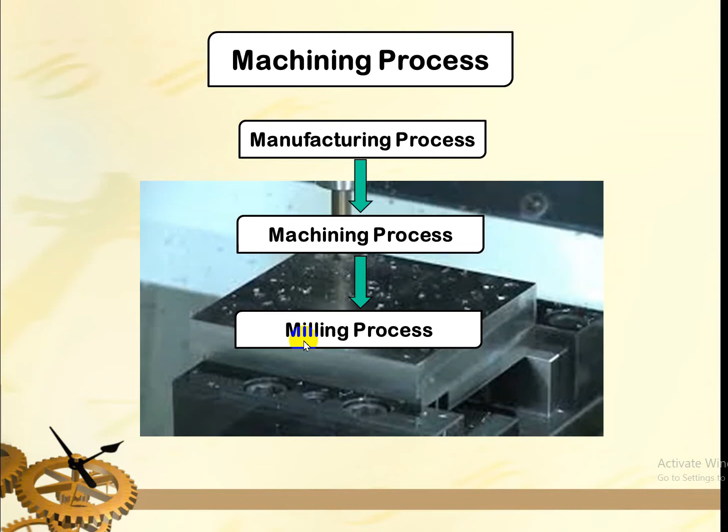Some of the challenges in manufacturing industries are how to achieve higher material removal rates and better product quality with good surface roughness.

In typical manufacturing processes, both are influenced by the cutting speed, feeding, and depth of cut.

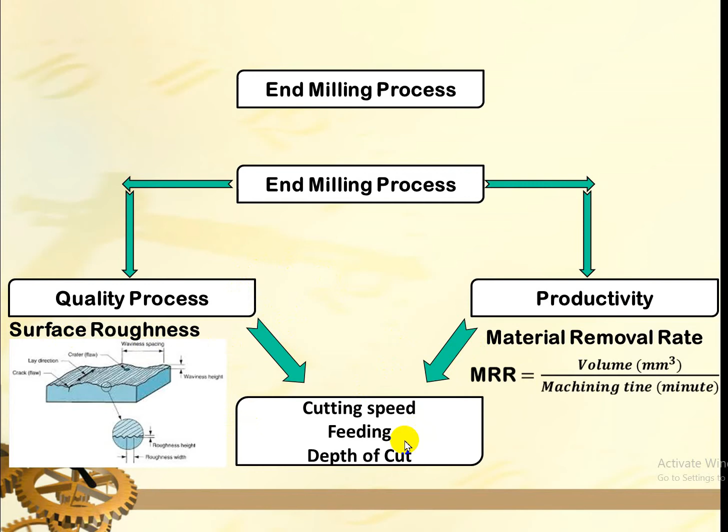Specifically, increasing both parameters will yield higher material removal rates, higher surface roughness, and heat generated by friction in the cutting zone.

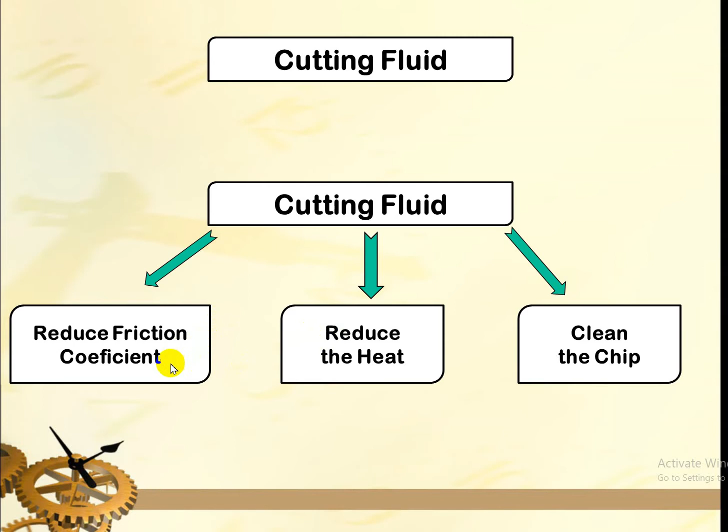Both the generated heat and the friction are commonly reduced by applying cutting fluids, which are also used to reduce friction coefficients and clean the chips.

Surface roughness has the smaller-the-better quality characteristic, while the material removal rate has the larger-the-better quality characteristic.

Therefore, the combinations of process parameters need to be properly selected regarding the machining tool and material properties in order to minimize surface roughness and also to simultaneously maximize the material removal rate.

This is needed to minimize surface roughness and also to simultaneously maximize the material removal rate.

The multiple performance characteristics could be achieved by determining the optimal parameters using the multiple performance characteristics optimization method.

In this research, a multiple performance or quality characteristics optimization method was developed based on statistical optimization.

The Taguchi method combined with Gray relational analysis is used to explore the relationships between machining or explanatory process parameters.

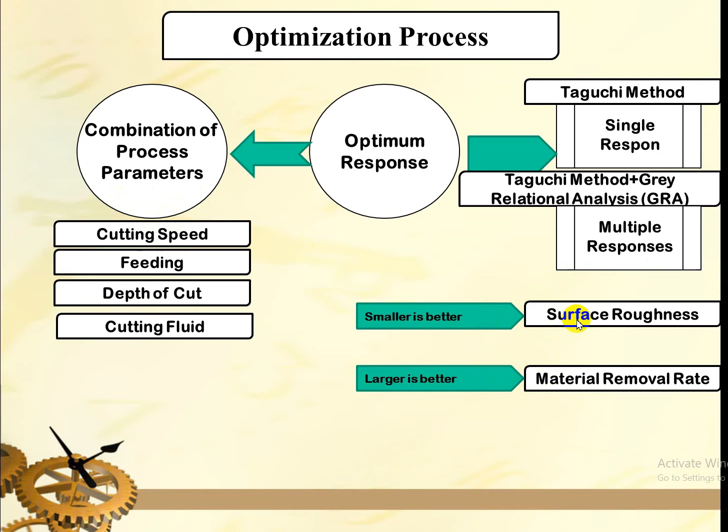The purpose of this research is to determine the setting combinations of cutting fluid, cutting speed, feeding speed, and depth of cut, which yields minimum surface roughness and maximum material removal rate.

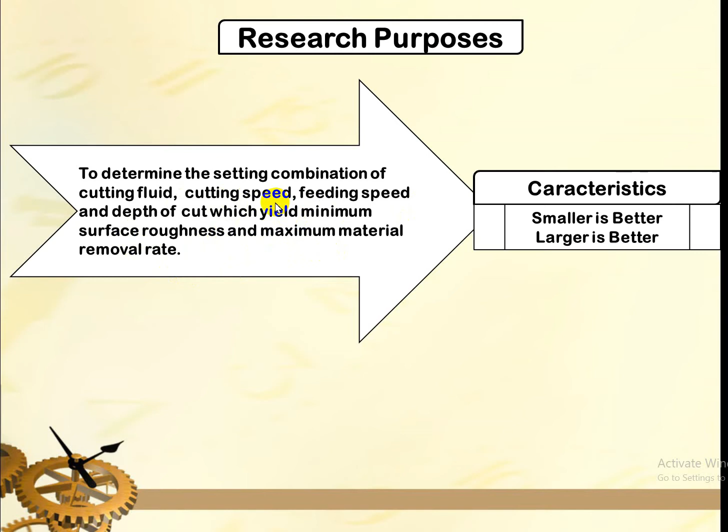The process parameters used in this research are shown in the table.

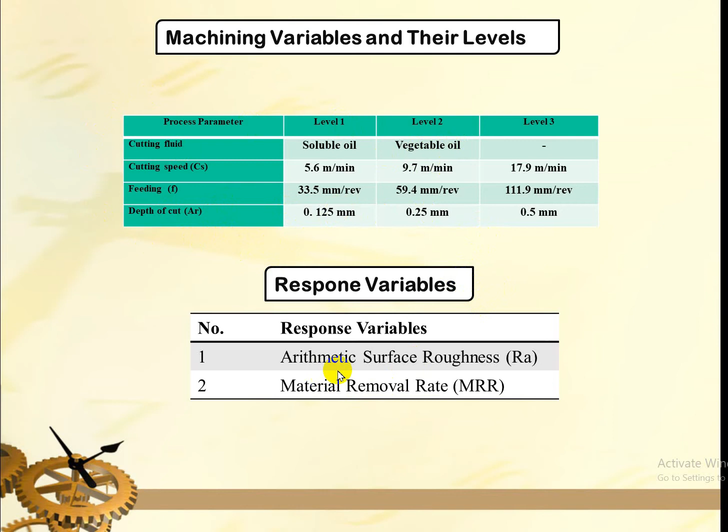The response variables in this research are arithmetic surface roughness and material removal rate.

The table performs the orthogonal array used for the experiments, leading to a total of 18 tests.

An L18 orthogonal array has been selected based on the Taguchi quality design concept for experimentation purposes.

In this research, the interaction effects of machining parameters have been assumed to be negligible.

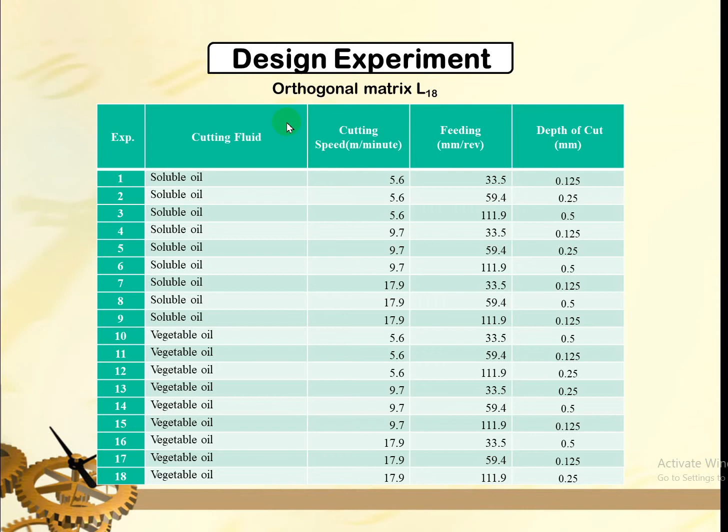The width is 30 millimeters and the length is 80 millimeters, and the hardness of this workpiece is 45 Rockwell C.

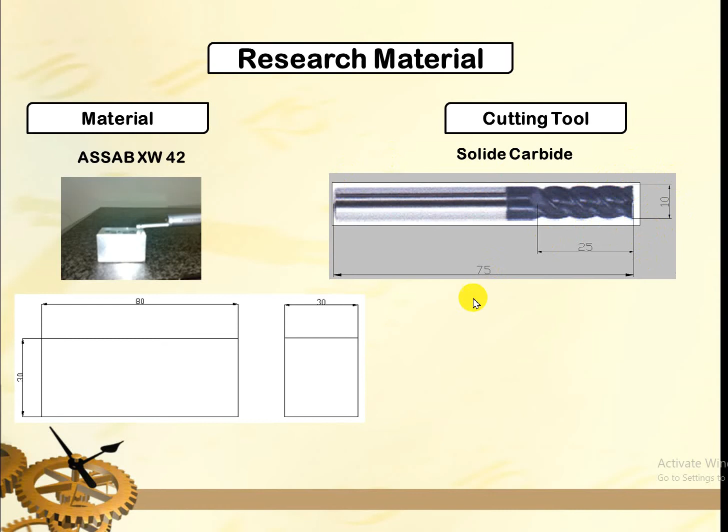The cutting tool used is a solid carbide end mill with 4 cutting edges, a diameter of 10 mm, and an overall length of 75 mm.

Here are the steps of the Taguchi Grey Relational Analysis optimization method. The first step is calculation of the SN ratio.

Signal-to-noise or SN ratio transforms the data of experiments into a value that represents the variation and average value of the response relative to the standard deviation.

Based on the types of characteristics, there are two different types of SN ratios, since material removal rate is larger-the-better and surface roughness is smaller-the-better.

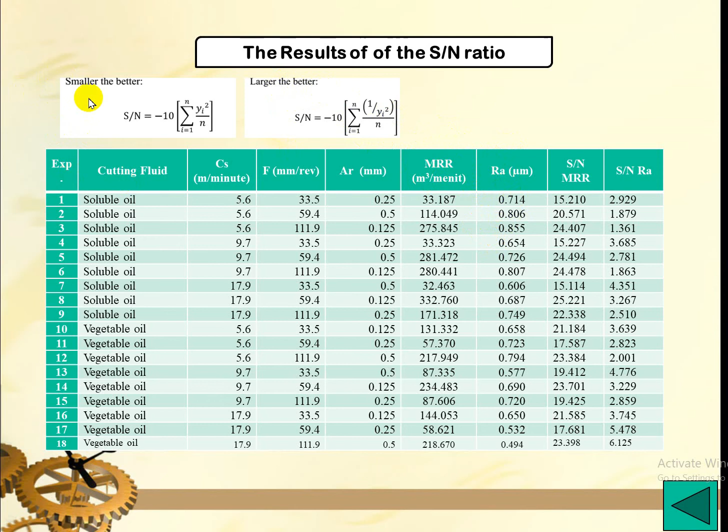The next step is normalization of the SN ratio for each response.

In the multi-response optimization technique, signal-to-noise ratio data must be normalized. Normalization is essential to make the SN ratio data dimensionless and unitless in order to make proportionate comparisons.

The SN ratio has been converted into a value in the 0 to 1 interval by using linear normalization, and this is the result.

This is the result of normalization of the SN ratio, which is determined by using the equations shown.

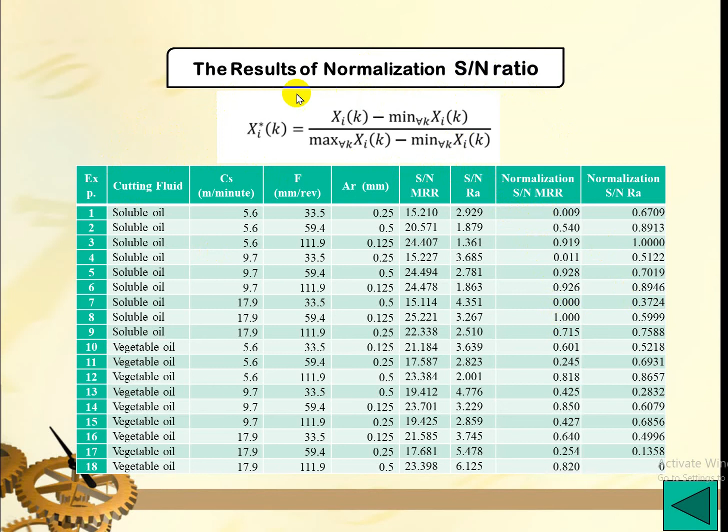The next step is determination of the value of deviation sequence and calculation of Grey relational coefficients.

Grey relational coefficient is applied for measuring multiple response relevance. The relationship among the actual conditions and the ideal conditions of the normalized response is shown by the GRC value.

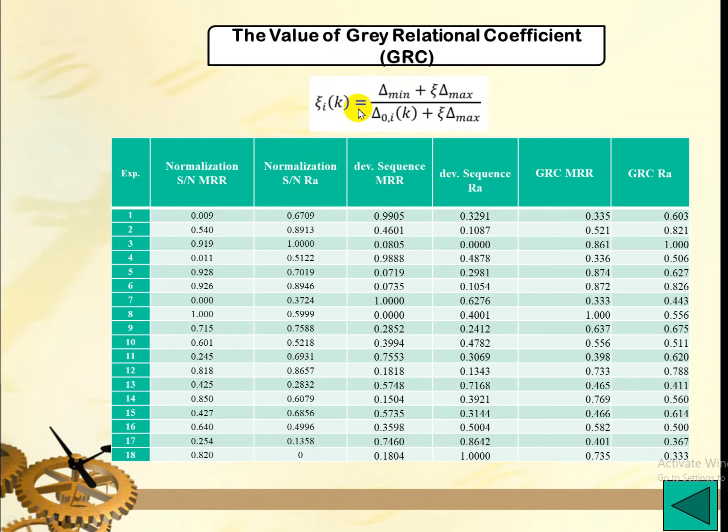The calculation of GRC is conducted by using these equations.

The next step is calculation of GRG, or Grey relational grade. GRG represents the degree of correlation between the reference and comparability sequence.

In the case of two identical sequences, the Grey relational grade is equal to 1.

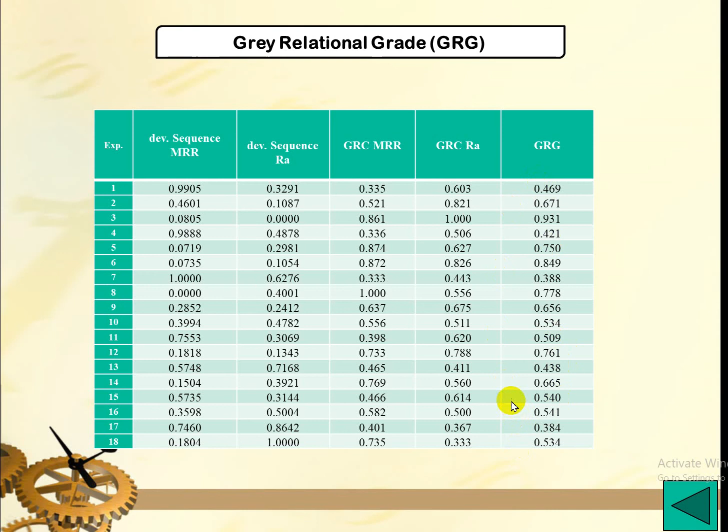The next step is performing statistical analysis of variance, or ANOVA.

The purpose of ANOVA is to identify which machining parameters significantly affect the machining performance characteristics, and also to obtain quantitative estimates of the contributions of each factor to all responses.

Based on the tables, the contributions of machining parameters in order are feeding, depth of cut, cutting fluid, and cutting speed.

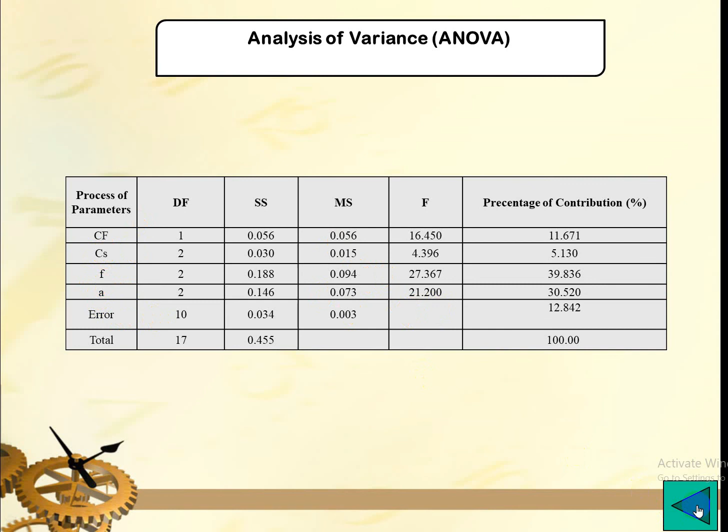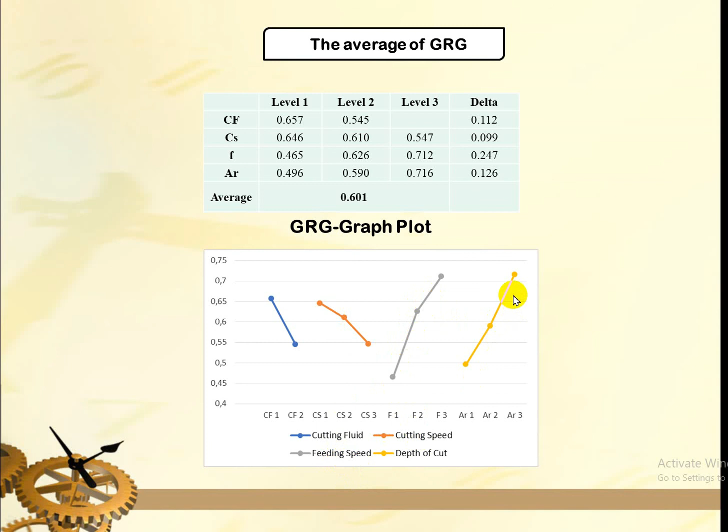The optimal combination also includes the third level of feeding speed and the third level of depth of cut.

Based on the experimental results and optimization process, we can conclude that the combination setting for milling process parameters that can minimize surface roughness as well as maximize material removal rate simultaneously is as follows.

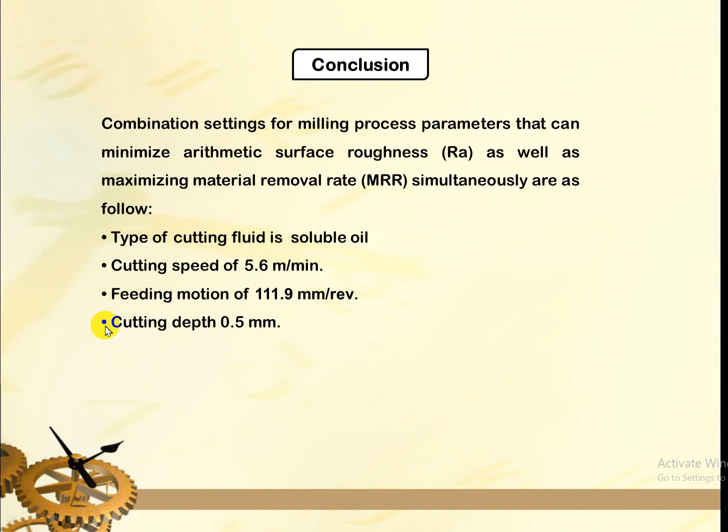Type of cutting fluid is soluble oil, cutting speed of 5.6 meters per minute, feeding motion of 111.9 mm per revolution, and cutting depth of 0.5 millimeters.